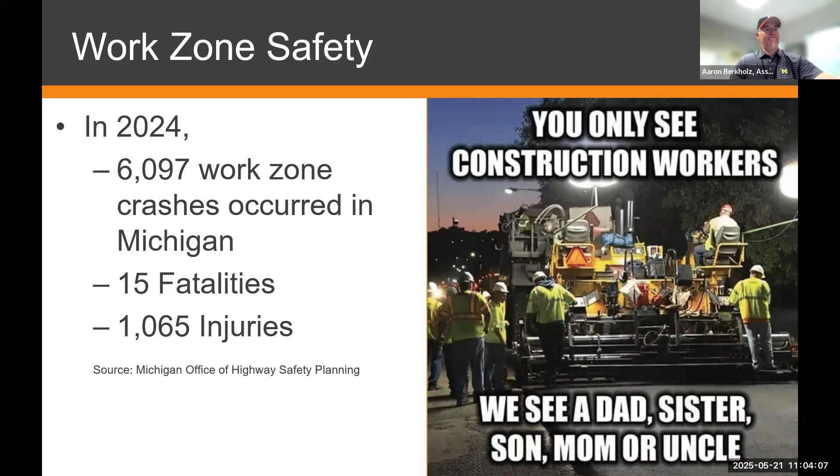Also, it is the law. In Michigan, it's required of drivers to be attentive, to slow down, to minimize their distractions, and to move over. And I'll say not only is it the law, but it's common courtesy.

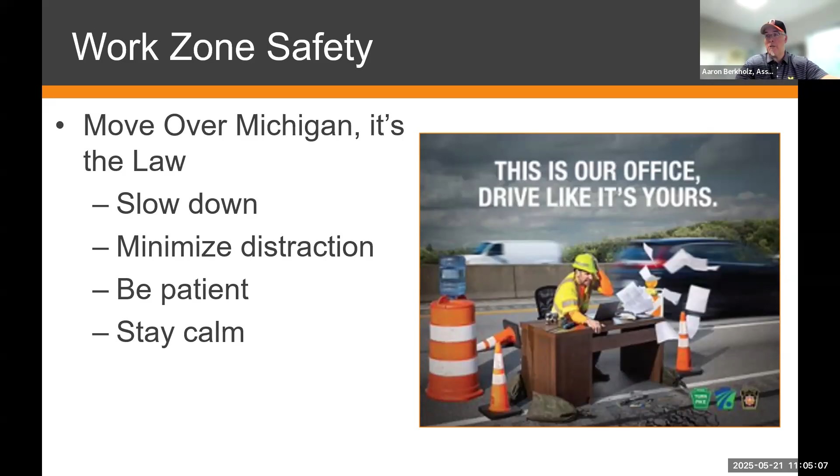Again, I would not go into someone's office during their workday and start to create a situation where I'm distracting them or yelling or not following the rules in their office. Drivers, when they drive through our work zones, need to follow our rules because that is our workplace, that's our workspace. So again, just really trying to highlight the fact that we need driver cooperation in order to keep all parties safe. We do not want injuries or, heaven forbid, fatalities to occur that can affect the families of the construction workers and the drivers.

So I'll go ahead and I'll turn it over to Brent to start the portion of the meeting where we're going to give an overview of the Road Commission. Go ahead, Brent.

Thanks, Aaron. That was a very important topic and one that's near and dear to all of us here at the Road Commission. Again, like Aaron said, thank you for joining us on our 2025 construction kickoff. I'll just go through a couple slides on who we are and why we choose the roads that we choose.

So you can go to the next slide. The Road Commission is responsible for just over 1,650 miles of county road. Of those, more than 740 are unpaved. We're also responsible for 125 bridges, over 2,800 culverts, and we manage and repair over 40,000 signs. We also are a contract agency for MDOT, and we maintain just under 600 miles of MDOT routes. Those are those numbered routes, US 12, I-94, M14, M52, M17. Those are the MDOT routes that we maintain on their behalf.

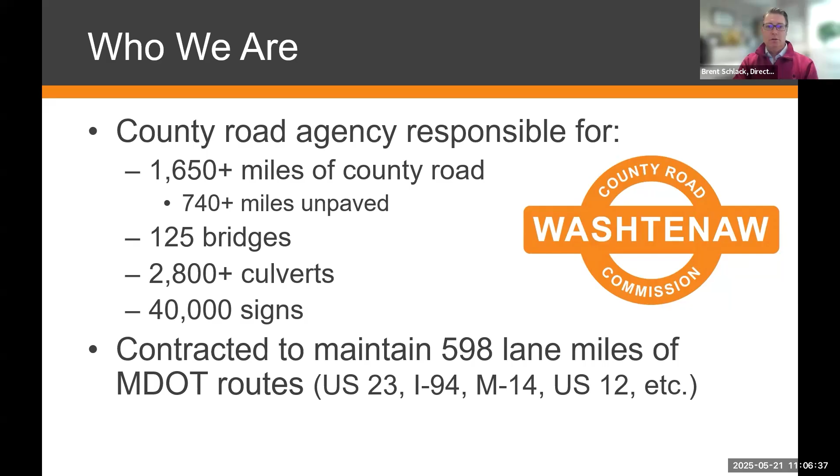So if you go to the next slide, now I'll get into how projects are selected. We have an asset management document, and we follow asset management practices, and this is the definition: it's the ongoing process of maintaining, preserving, upgrading, and operating physical assets cost effectively based on a continuous physical inventory and condition assessment and investment to achieve established performance goals. That is a big mouthful.

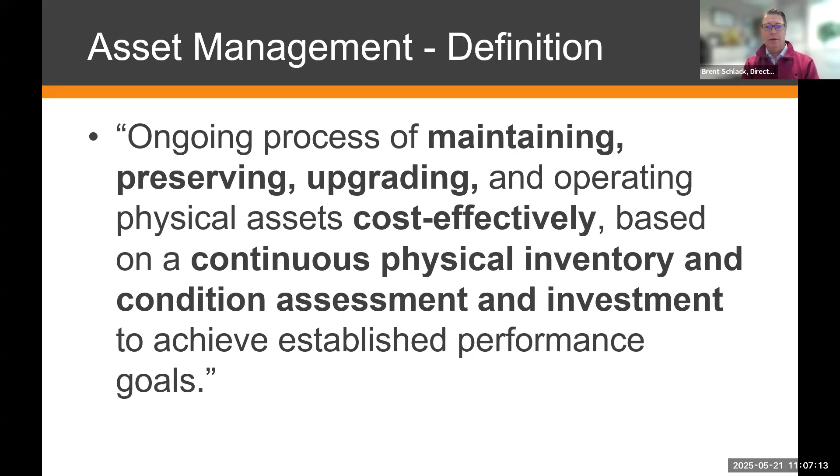Basically, we focus on preventative maintenance. We use a rating system called PASER, which stands for pavement surface evaluation and rating. It's a visual inspection that trained individuals here go out and perform on our roads. Our primary road system they inspect every year, and our local paved road system they inspect every other year. This is on a scale from 1 to 10, 10 being the best and 1 being the poorest.

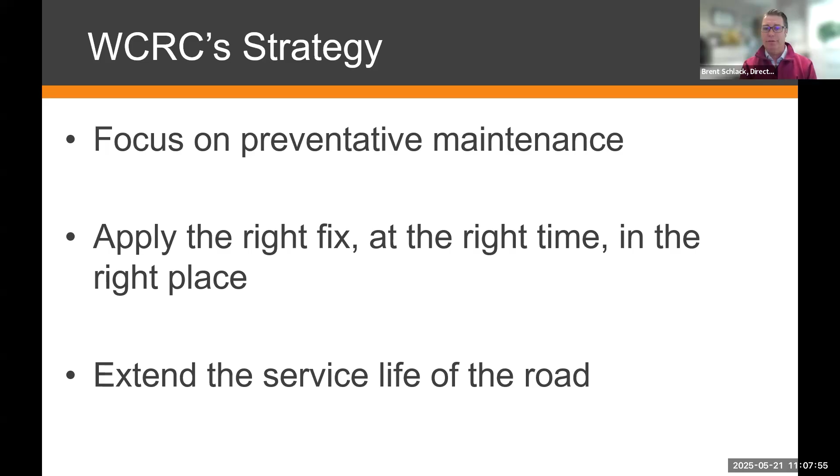We break that down into good, fair, and poor designations, and this helps us determine what preventative maintenance fix to apply. Again, it's applying the right fix at the right time in the right place. Our whole goal is to extend the service life of a road.

We use the example of changing the oil in a vehicle. If you regularly change the oil in your vehicle, the service life of that vehicle tends to last a lot longer. Whereas if you didn't change the oil, it would be a larger fix, and your vehicle would start to break down, which would cost more money. So we want to have that right fix, whether that's a chip seal or a mill and overlay, for our roadways to try and maintain the service life of our roads.

So now I'll pass it over to Adam, and he'll get into some of our construction projects.

I'll talk really quick here about the 2025 season. I'll lay some groundwork, and then we'll get into talking about the projects and types of projects we are going to perform this year. As is typical, you probably recognize throughout the county, the same thing's going to go for 2025. For our types of projects, we'll start with preservation type projects.

This really involves preserving and protecting the existing surface. Then comes resurfacing, which is replacing the surface that traffic drives on. And then reconstruction, which is removing and replacing the base and the surface material of the road. Think of it basically as the stones underneath the pavement.

We also have some bridge projects, which is maintenance and replacement type work we'll do each season. And then we have safety projects to improve safety characteristics of our road segments throughout the county, and those vary. We'll touch on this a little bit here, and if someone has a specific question about a segment of road, we can talk through the chat as well. Then there are some other miscellaneous projects throughout the county.

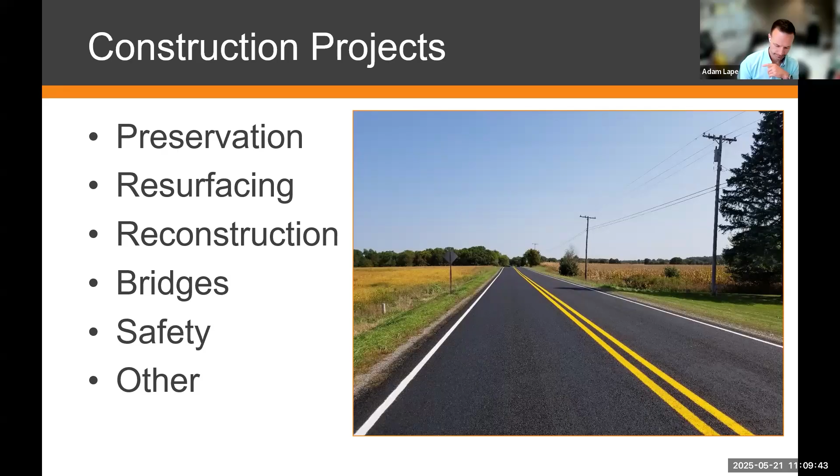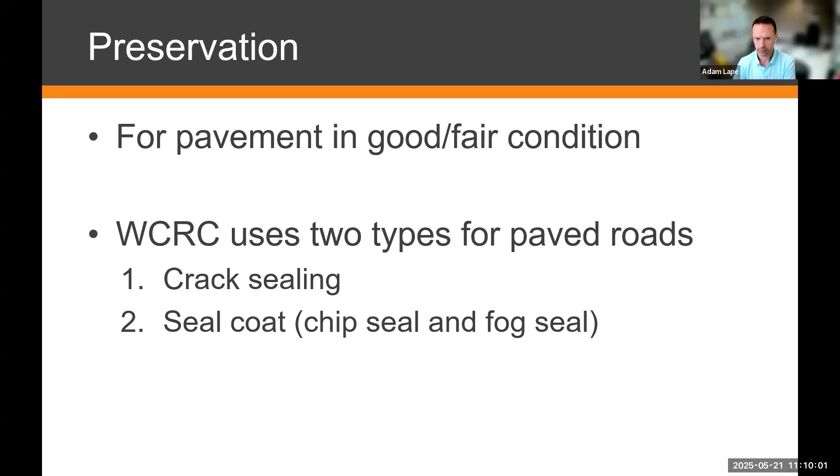For our preservation purposes, that's really good or fair condition road surfaces that Brent was referring to. We have two primary processes to take care of our roads in the preservation stand, and that is crack sealing and seal coat, the chip and the fog seal you'll see us perform. I'll go to the next slides and talk a little bit more specifically about each.

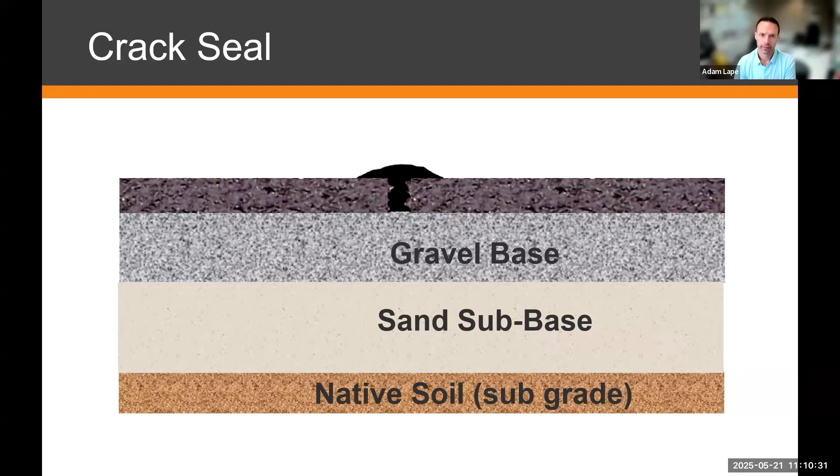Our seal coat process is really similar, but it seals the entire surface of the road. This is essentially a waterproofer, we've referred to it before as sunscreen, you really want to protect yourself when you go outside. Same thing as putting a new roof on a house, you want to protect yourself from the elements that inevitably affect our roads, mainly water, and then the sun itself, which will degrade the road over time.

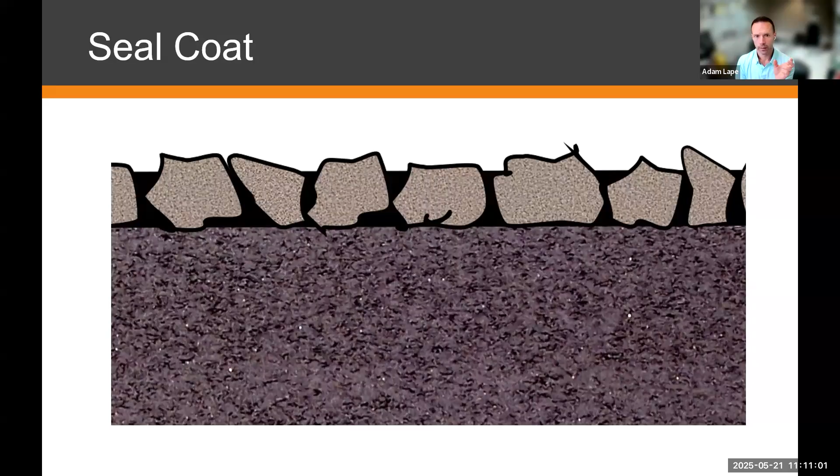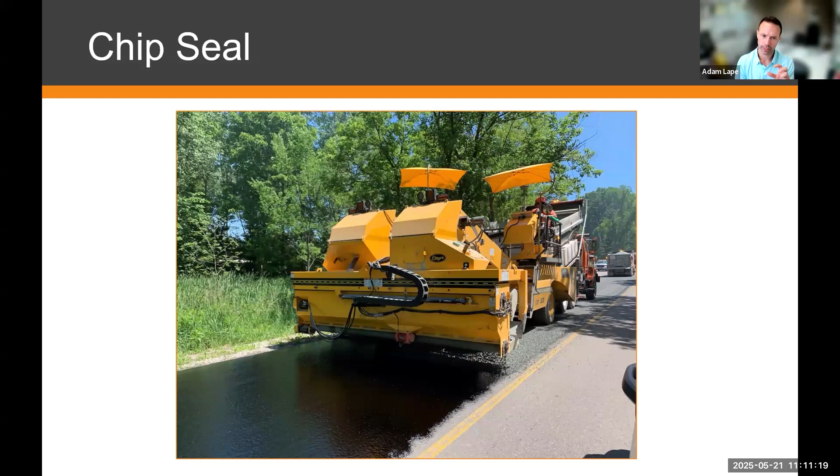We'll spread the material, and we'll show a few pictures in a moment. We spread a liquid binder material, which is a sealer, that's the black material you see in the picture. Then we have a unit, the yellow unit in the picture, that spreads stone, spreads aggregate on the road, providing a bit of traction. It doesn't add any structural integrity, all it does is provide that traction, that wearing surface for the road, because that sealer would be slippery otherwise.

Later in the season we come back, and you've probably seen this throughout our county. We refer to fog sealing as putting that top sealer coat on top of the aggregate we just put in on the seal coat program, the chip stone. What that does is provide an additional layer of sealant, and it also gives that black look to the road.

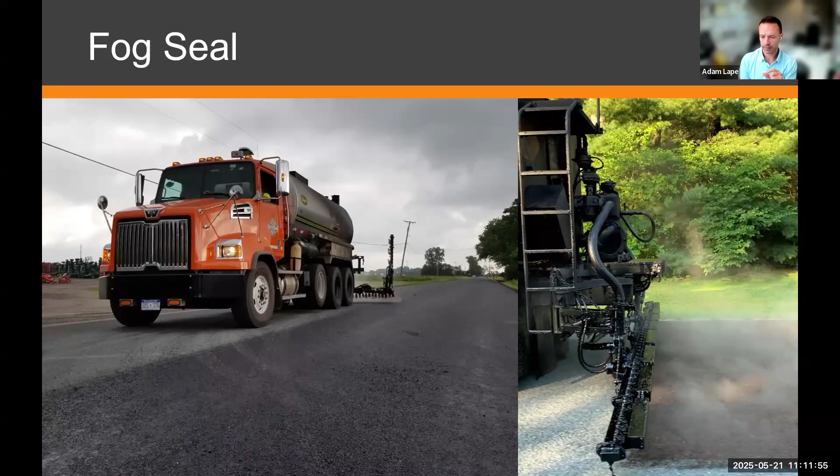We'll send those units out where we have busier segments of road that we're going to seal. And essentially, we just need traffic to follow us. It's very simplistic. We'll keep it simplified for traffic to follow us right through the zone and which side of the road they need to be on, and then we'll direct you accordingly.

And now I'm going to touch back. We've been talking resurfacing. Now we're going to get a little more in depth with resurfacing here beyond the preservation side with Aaron Burkholz.

Thank you, Adam. So again, going back to what Brent had talked about earlier, we use a mix of fixes to manage our road assets. Depending upon the condition of the road, that dictates the work that we can do. So for resurfacing of a road, two of the methods that we'll use with an asphalt road would be to mill and resurface that asphalt road. That would be for roads that are in fair condition. If the road hasn't deteriorated too far, we're able to mill and resurface. If the road has further deteriorated and it's in poor condition, then we get into more of a pulverization of the existing road and then paving that road, putting new asphalt on top of that pulverized base material. And then the third type of resurfacing that we commonly undertake would be putting down a lift of limestone or gravel on an unpaved road.

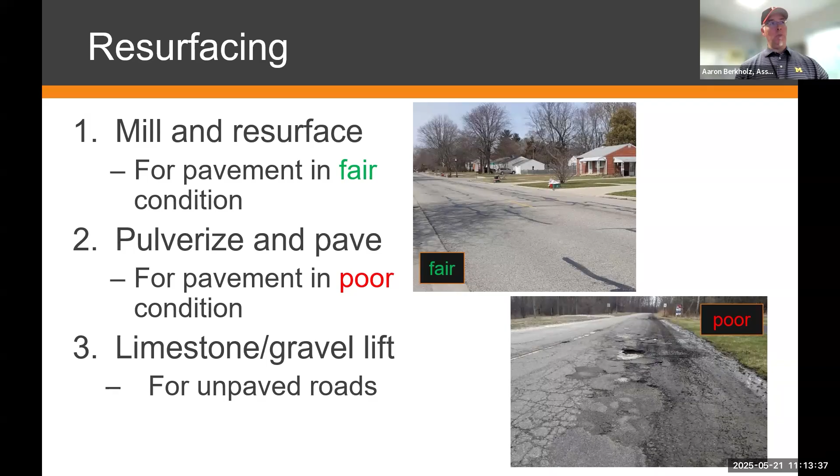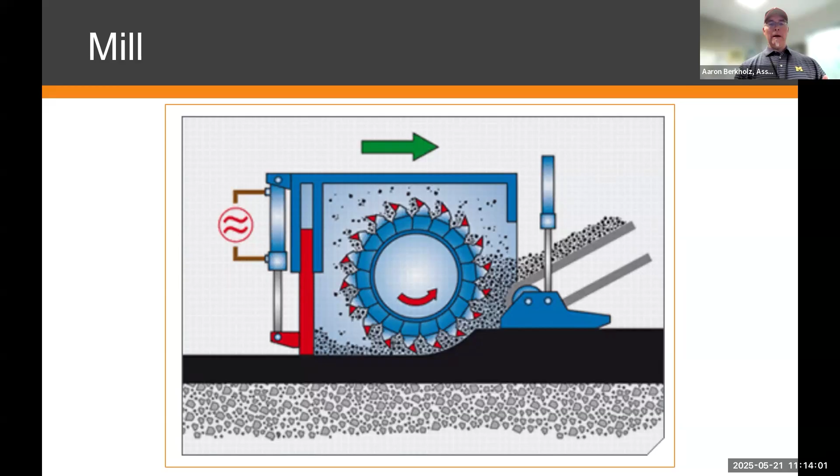There's a large mill machine that comes out, and there's the picture of it. So what that machine contains is like a rototiller, is what I'll refer to it as. You can kind of picture that rotary drum with teeth on it inside that machine. It's underneath in the middle of the machine, and it's grinding up that pavement surface, that 1.5 or 2 inches, and then it's pushing it up a conveyor and into a truck. Just to offer a point of interest, oftentimes that material going into that truck, that ground asphalt, is then taken to an asphalt production plant and reintroduced into new asphalt. We refer to that as recycled asphalt pavement, RAP. So basically there's a certain percentage of new asphalt that goes down that actually contains the old asphalt that's been milled up off the road.

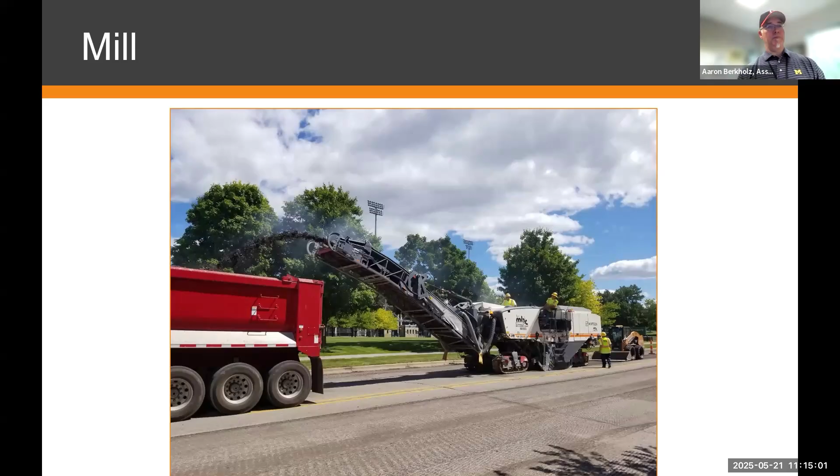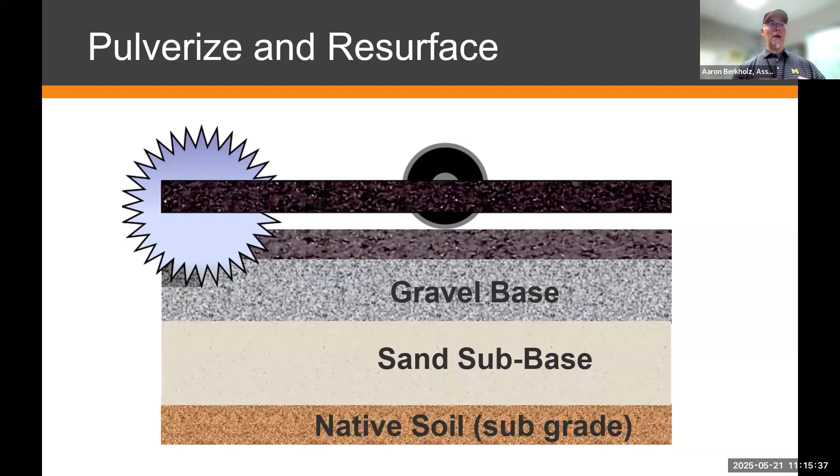Next slide. And then I mentioned that if the road is in poor condition, we get into a pulverization and resurfacing. So the pulverizer sometimes can look like the mill machine, but it operates a little bit differently. The drum under the machine actually turns the opposite direction. On a mill machine, the drum underneath with the teeth turns clockwise. On a pulverizing machine, it turns counterclockwise. And that's because we want to keep that material that's being crushed under the machine.

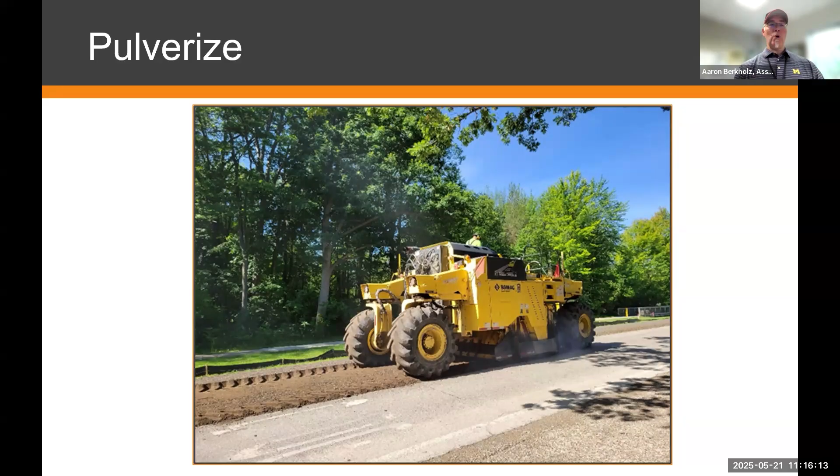Here's an example of what that machine looks like. You can see there's no conveyor on this machine. The material's not being pushed up a conveyor into a truck. It's remaining under the machine, being crushed and being blended. So you're taking that existing poor asphalt surface on the road and blending that with the underlying base aggregate, creating this homogeneous mix of material. Then that material is spread out, compacted, and then we actually apply a new asphalt surface to that.

Something to note is that asphalt is very hot. For people that may be in the area, it's important that anybody like a pedestrian or a bicyclist, someone with a dog or small children, stay away from that asphalt because it's typically between 275 and 300 degrees when it's being placed. For motorists, it's important that they follow the direction given by the traffic regulators, also known as flaggers on site, because you don't want to drive through asphalt that's just been placed. You can imagine if you drive your rubber tires through asphalt that's 275 degrees, generally that's not good for your tires, and it's also not any good for our new asphalt.

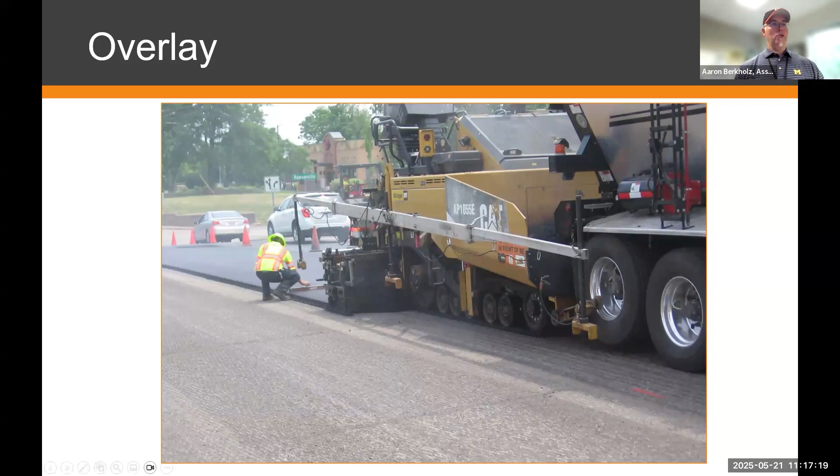We'll continue that through the season, likely into October, November, and then start back again in the spring at each season. It's a very important part of the process, and the soft surface roads certainly do benefit from it.

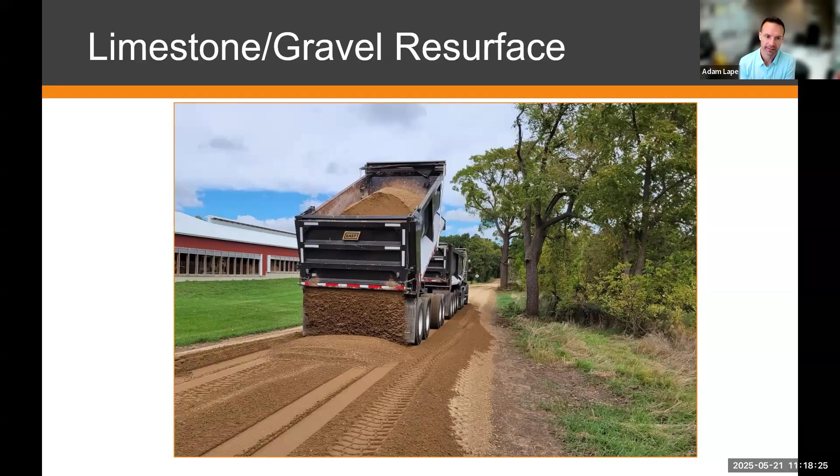I believe Aaron's going to talk a little bit more about resurfacing and what we're doing in 2025. Thank you, Adam. So again, the Road Commission is resurfacing our part of the planet here in Washtenaw County. We're going to asphalt pave approximately 27 miles of county road.

We're going to place either a limestone or gravel resurface, a lift of limestone or gravel, to the tune of about 7.2 miles of county road. And then Adam and our operations team working on chip seal are going to create that chip seal surface that Adam talked about earlier on 49 miles of county road. So a great deal of resurfacing will be done in this construction season of 2025.

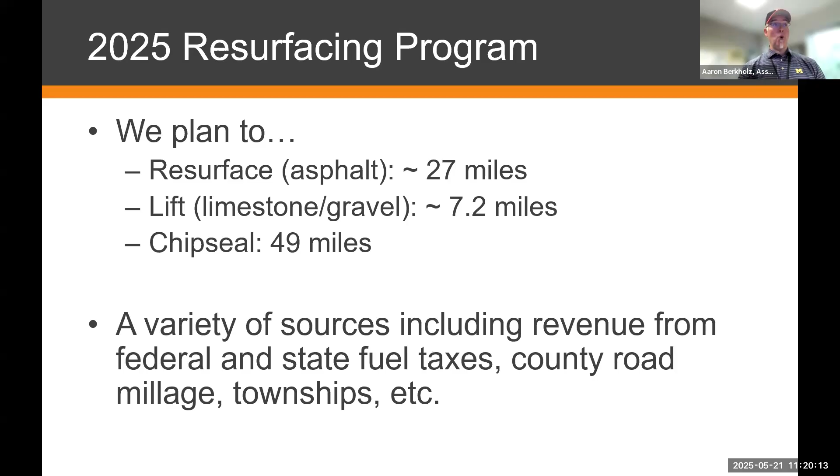There's a variety of sources of revenue to accomplish this work. We work as a team here at the Road Commission to secure federal funding, which is typically project specific, identifying specific projects on which those funds would be used. The biggest part of our revenue is generated by state fuel taxes, registration fees, and we're very fortunate to have a county road millage. We really appreciate the continued support of the voters of Washtenaw County in affording us the opportunity to take that millage money and invest it directly into our annual resurfacing program.

We also have great partners at the township level, and townships are not required to contribute to road projects. But the reality is, particularly on local county roads, unless townships are able and willing to contribute, we can't make improvements. So again, we can't speak enough about how much we appreciate our township partners in accomplishing our good work each year.

Some of them are mill and resurface, some are pulverizing and paving, and then some are the limestone resurfacing that Adam talked about. I'll mention that some of these roads have higher traffic volumes. An example would be Clark Road and Huron River Drive, in the vicinity of St. Joe's Hospital - I'm dating myself, I believe it's called Trinity Health now. But that's a very busy section of Clark Road and Huron River Drive.

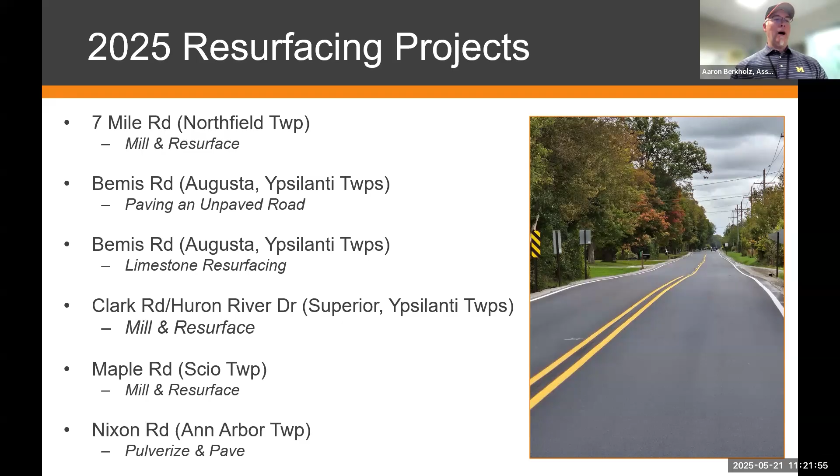We're going to do a mill and resurface there. With a mill and resurface project, we can maintain traffic - we can have traffic run in the adjacent lane and control that with flaggers while we're working in a closed lane. With a pulverization and overlay project, an example would be Nixon Road.

Nixon Road, from US-23 north up to Pontiac Trail, is in such poor condition that we have to pulverize that road. To pulverize and shape that material, compact it, and prepare it for paving, we have to close the road. Now, we would maintain the road for local traffic, like for instance, there are some subdivisions along that section of Nixon Road.

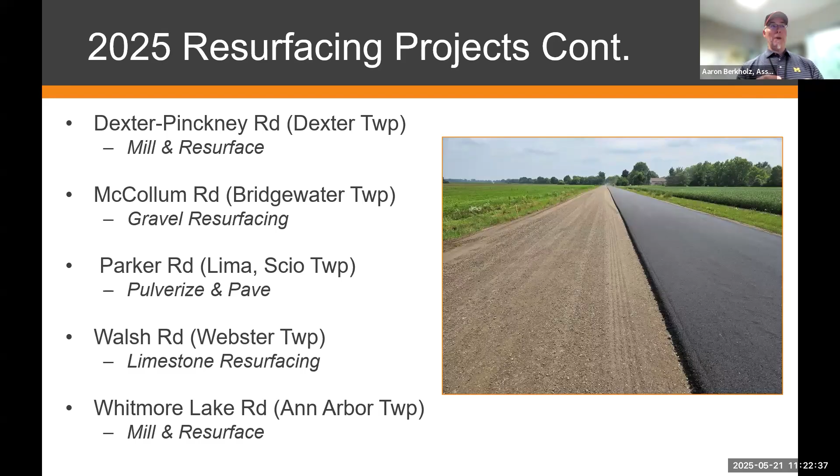But again, we would have to limit the traffic to just the local traffic—the people that live within that. We would maintain it for garbage pickup and for delivery. There are some differences between a full closure and a lane closure, depending on the scope of work. The best way for the public to identify specific information on any of these projects is to reference the Road Commission website.

You can find a map on the Road Commission website that includes all of our resurfacing projects as well as other projects we're performing this season. You can click on the section of road you're interested in to get details like traffic impacts or the specific scope of work. That's the best way for stakeholders, motorists, bicyclists, and officials to know what's going on. It also provides a point of contact, since we have specific project managers at the Road Commission who oversee individual projects.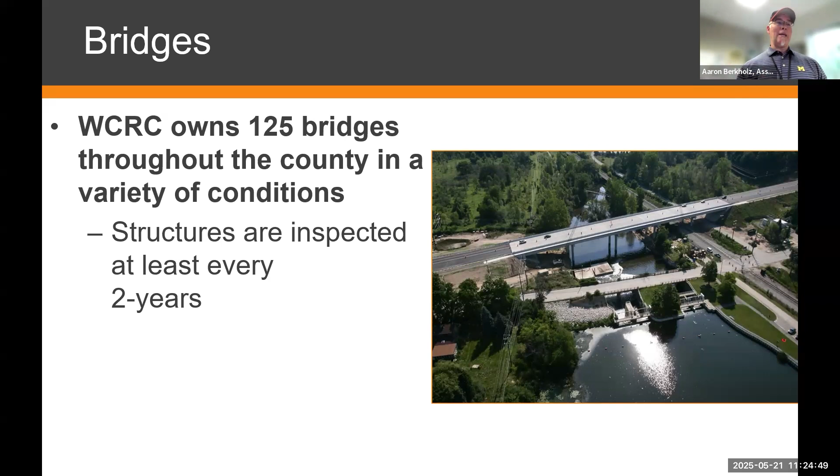The vast majority of the bridges we own are more in the range of 20 feet to 100 feet in span. Anything less than 20 feet we refer to as a culvert. Culverts are typically smaller structures, under 20 feet, and a lot of times they're pipe culverts, like the example shown here. We own over 2,800 culverts throughout the county, in varying sizes and various conditions.

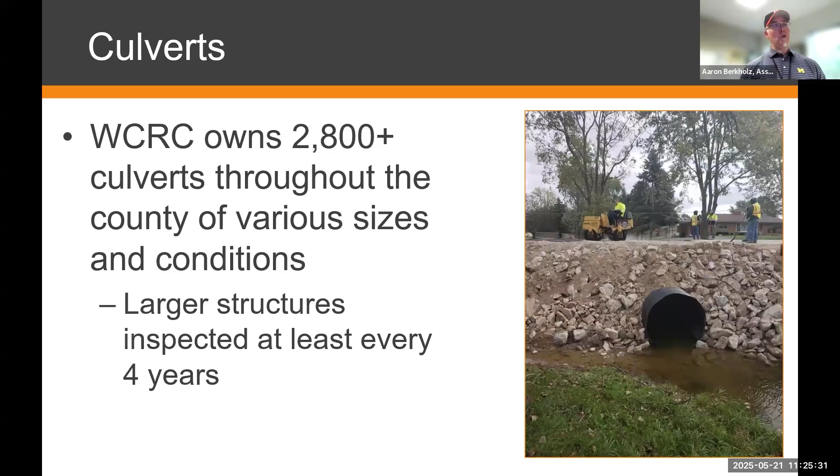We inspect our culverts—anything 5 feet or greater—at least every 4 years. If a culvert is in poor condition, especially if it has a weight restriction, we increase that frequency and inspect it yearly just to make sure we're monitoring the condition of that deteriorated structure.

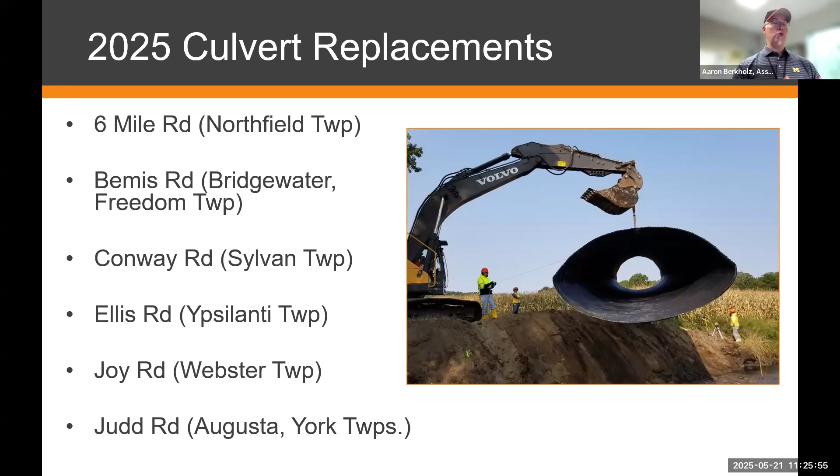We have a lot of culvert replacements in this year's program. A big part of the culvert replacement program has been made possible by working with our township partners, the Road Commission, and the Water Resources Office, because Water Resources was provided funding through the county board to undertake stormwater improvements. Replacing a county road culvert does enhance stormwater quality.

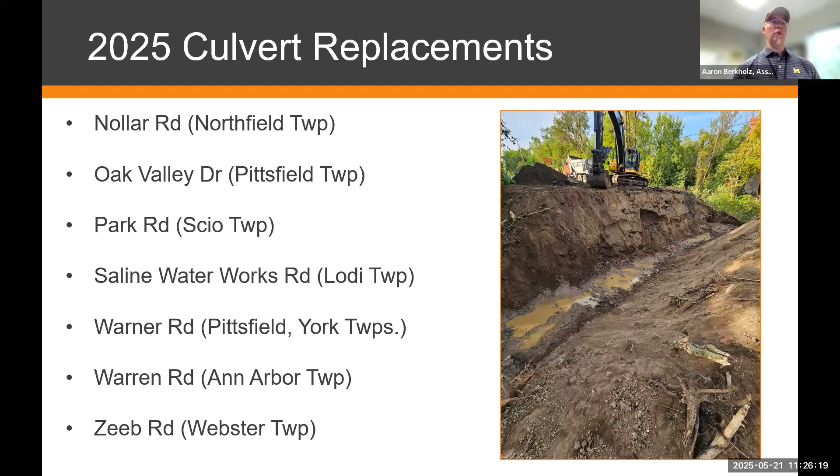This shows a list of some of the culvert replacement projects we're going to undertake this year. Again, a great resource for the public and our stakeholders is the Road Commission website—you can look at the map for specific information on a given culvert project, the scope of work, whether it requires a road closure, and who the project manager is that you can contact. We have culvert projects throughout the county this season that we've identified and intend to complete.

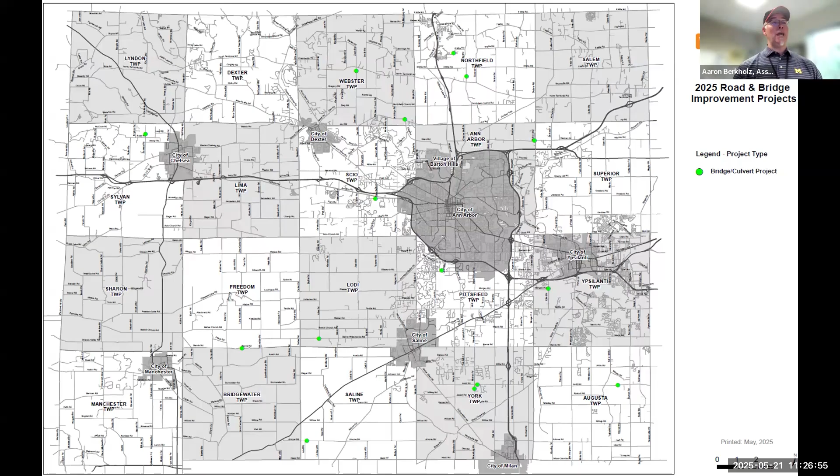So I'll go ahead and turn it back over to Brent, and he's going to talk specifically about some traffic and safety related topics. Thanks, Aaron.

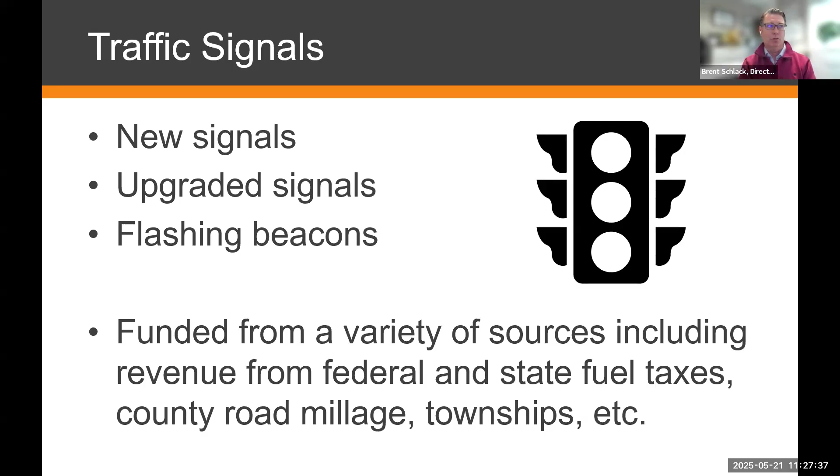We also have projects within our traffic and safety group. These projects include new signals or upgrading signals to modernize them, or installing flashing beacons or rapid flashing beacons for mid-block crossings. These, again, as Aaron stated, are funded from a variety of sources—federal aid, Michigan transportation funds, state fuel taxes and registration fees, county millage, or with some of our township partners.

Here's a list of projects we're working on. Some have been completed this year, like 6 Mile and Currie, where we installed a flashing beacon, and Bemis and Marlow, where we worked with Augusta and Ypsilanti Township to install a rapid flashing beacon. One upcoming project will be a new traffic signal at Parker and Shield.

That's in Lodi and Scio Township.

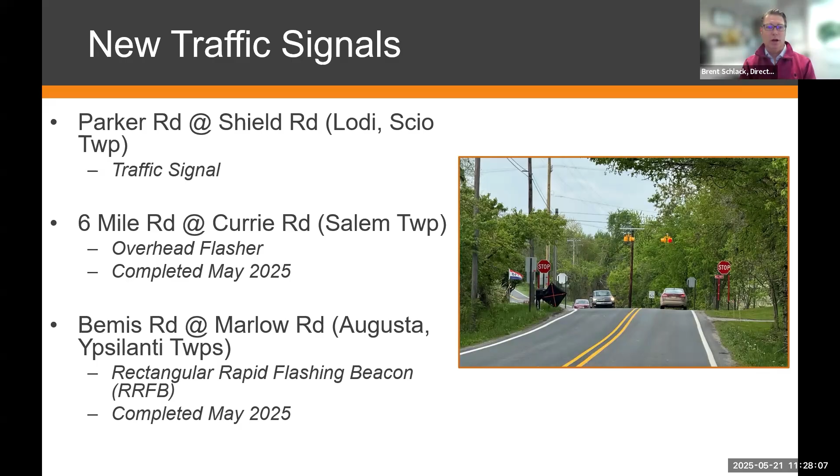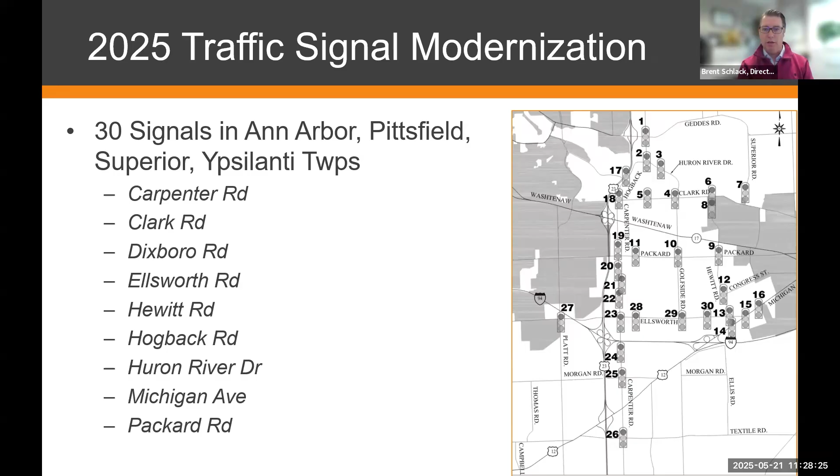We also, like I indicated earlier, modernize our signal system. You can see a lot of our signals are on the eastern side of our county, and we have about 30 signals that we're modernizing. These would be through a federal aid project, through congestion mitigation and air quality, and there's a long list along those corridors that we're looking at for modernizing those signals.

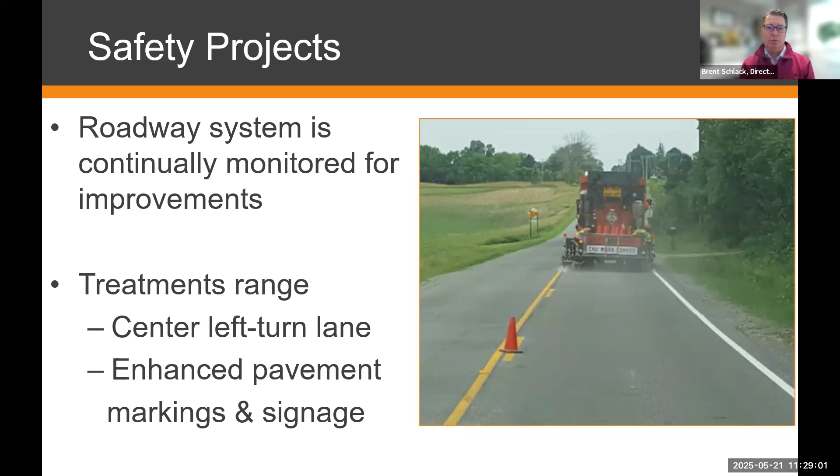We also have safety projects that we perform here at the Road Commission, at locations we've continued to monitor for improvements. We're looking at center left turn lanes to help move people out of the flow of traffic to make their turning movement. We also have enhanced pavement markings and signage, and those can be from a variety of sources, whether local funds or federal aid.

We also upgrade and repair guardrail within the traffic and safety group, at locations where we need new guardrail or need to modernize existing guardrail. Unfortunately, we do have locations that get hit that we have to repair, so we manage that contract with a contractor.

We also have a traffic management program, our NTMP, which looks at traffic calming, mainly installing speed humps within certain areas that qualify. Foster Ave has gone through that process, and they'll be getting speed humps here soon.

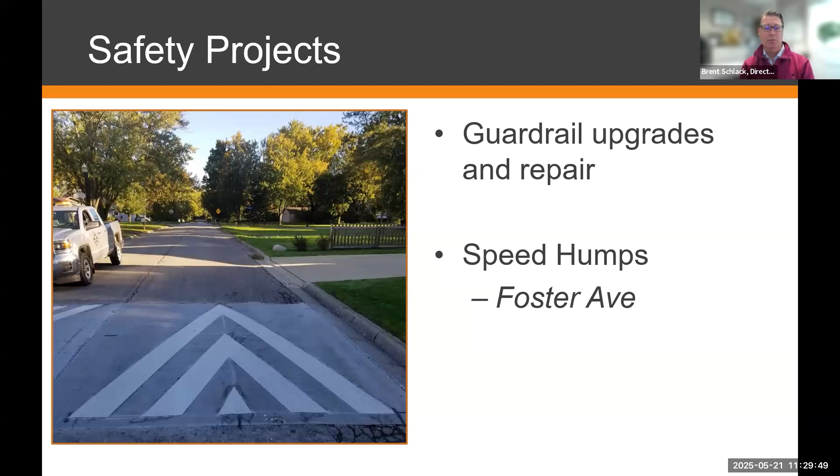One big program for us is our pavement marking program, where we install over 6 million feet of long line pavement marking—our white and yellow markings. Some of that is retrace, and some is on chip sealed roads where we need to repaint those lines. We also have special markings: stop bars, turn arrows, crosswalks, railroad markings, and the green paint for non-motorized lanes, those bike lanes. So we look to improve those locations.

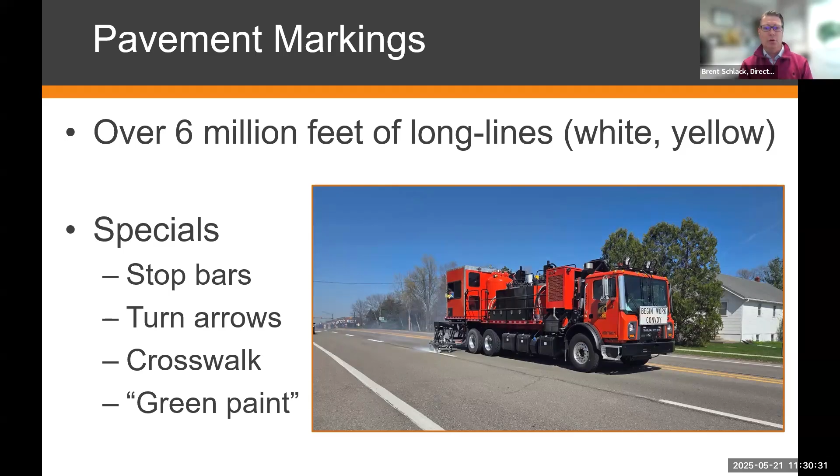So now I'll turn it back over to Adam, and he'll get into some of our road maintenance.

Thanks, Brent. We'll talk a little bit about maintenance we perform quite often throughout the county, and how we schedule that maintenance. A lot of it is as needed, in response to field information and current conditions we receive through staff, constituent calls, and our WCRC fix-it requests. That varies from pothole patching, general maintenance, drainage, grading the soft surface roads, and weather events that routinely require our staff to clean up debris impacting traffic and potentially blocking roadways.

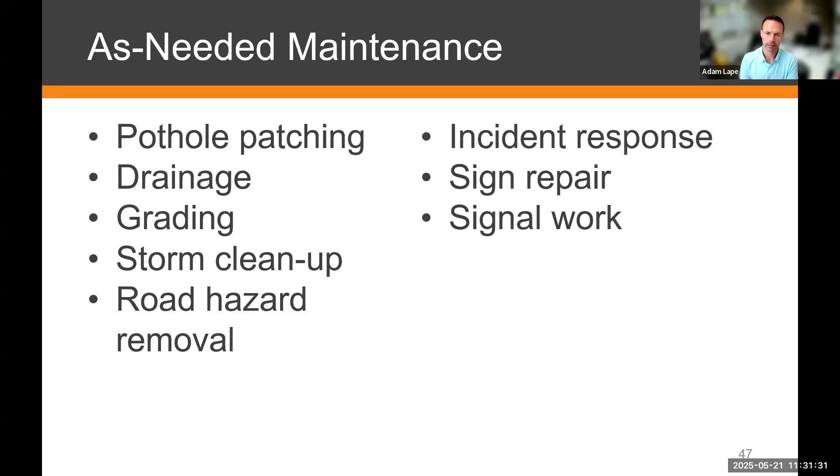Then there's road hazard removal—some of the unfortunate things you see through Mother Nature, like animal carcasses or debris that falls out of vehicles, things we address routinely throughout day-to-day activities. And as some of you probably saw this morning with the freeway system, we have quite a bit of incident response responsibility from our staff. We responded to some crash incidents this morning. Our traffic and safety team out of the engineering department also has staff who repair our signs and perform signal work throughout the county.

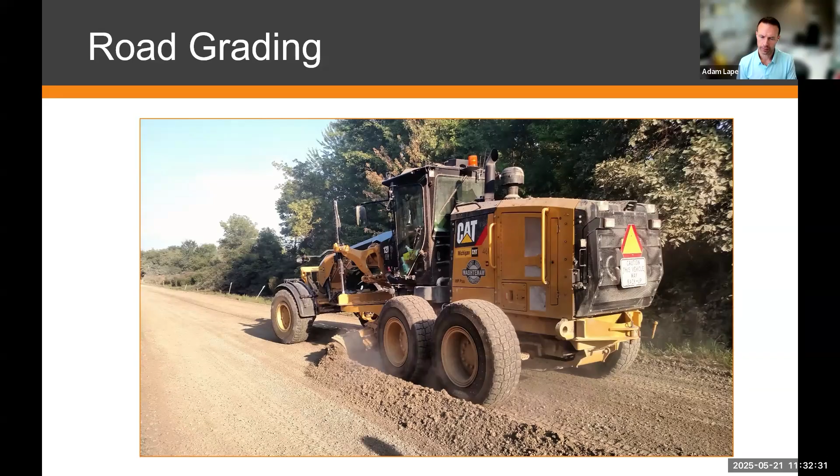Here's a picture of road grading. This is near and dear to most people in the county, with over 600 miles of unpaved road—something you definitely see and come across. Here's our process: this is one of our 11 road graders out grading a road, which we refer to as scraping. We scrape the road, collecting excess material pushed off the edge and building a windrow—that's the material off the left side of the grader unit. Then we scrape the other side of the road and start to build the crown back up, smooth it out, and apply dust suppression, which is the dust control or brine you may hear us talk about.

Moving to the next slide, you'll see that's still scheduled maintenance that we work forward with. The dust control program largely rules and pushes most things forward, scheduling a lot of our other maintenance because we want our roads to be as solid as possible and prevent fugitive dust. On top of that, toward the edge of the road, we perform roadside mowing, and also just a quick reference to some of the paved surfaces throughout the county.

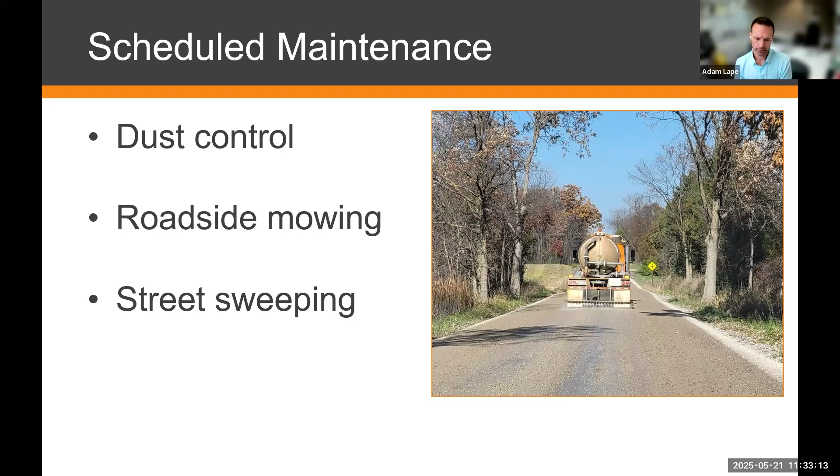We do sweep twice throughout the season in the curbed areas, and some townships partner with us for a third, supplemental sweeping. Now we'll move to the next one and talk a little bit about scheduling.

We typically work mid-April through mid-November, what we consider a construction season. Obviously, we're subject to some environmental restrictions and just weather in general. This week has been a little unseasonably cool, so we've had to adjust some of our progress and processes with the project specifically. We've kind of downshifted a little to let that warmth come back. We do need dry conditions for the most part, and we also need some generally decent warm weather to continue some of our work.

Off-season projects are typically possible, but those are usually preparatory work for another project or on an emergency basis, because it's very challenging to work when it's cold. And obviously with snow-covered surfaces, we can't quite get our equipment in there to do that work.

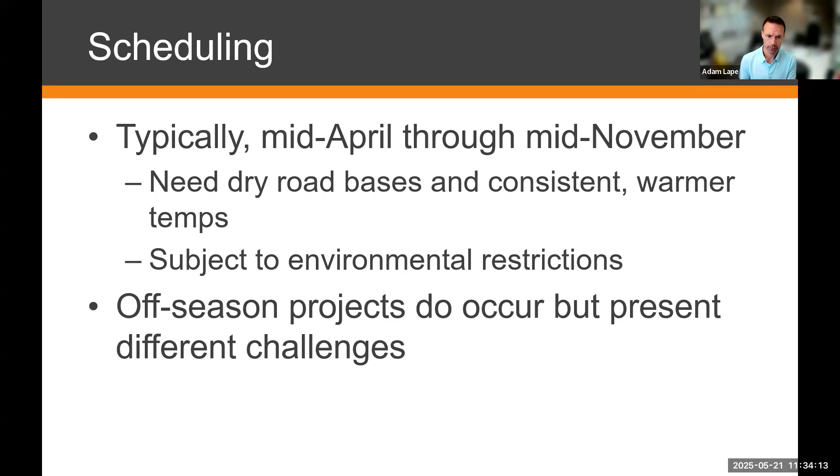One environmental restriction I have to note is we are sometimes restricted through bat roosting, fish spawning, mussel spawning, and oak wilt considerations. So we try to be considerate of that, but it does affect some of our schedules. That's why sometimes you see us do drainage work mid-season, in a drier time after July, really based on the environmental impact we try not to cause.

It's very weather dependent. Just like I noted, our seal coat program - we ran a little bit yesterday, but we had to stop and pause today. There's just too much humidity and moisture present.

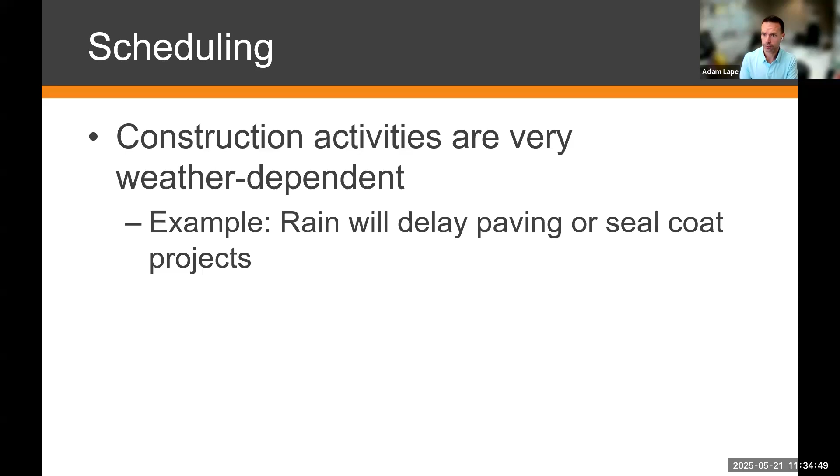It is a bit complicated as we schedule. We have a lot of moving parts and a lot of responsibilities to consider. We have a responsibility to MDOT, so we have to make sure we're not affecting their traffic with traffic we create through a road work zone. And as the environmental considerations I noted, utilities do impact our work from time to time, so we have to work on relocation and really just coordinate with other projects, whether it be an MDOT project or another internal county project. And then inevitably, we have to find the specialized equipment to conduct that work.

This really is that reminder - Aaron and I talk about this quite a bit in all our presentations, but it is serious to us and it matters to us. If the road's closed and we have the signage and the cones, or there's a vehicle there blocking with our flashing work lights on, it really does mean it's closed. There could be danger behind it, there could be something going on, there could have been a catastrophic failure with the road. It's very important that you abide by those guidelines we set in place to try to maintain everybody's safety, including our crew's safety.

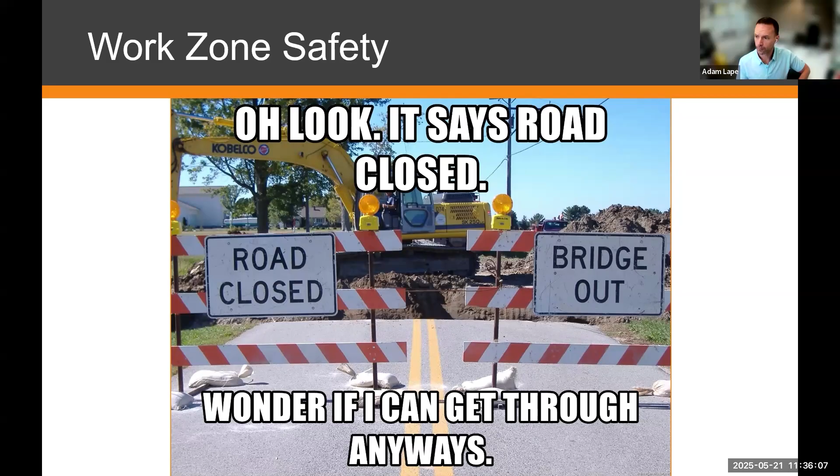So now I'll give Tiffany an opportunity to speak a little bit on construction communications.

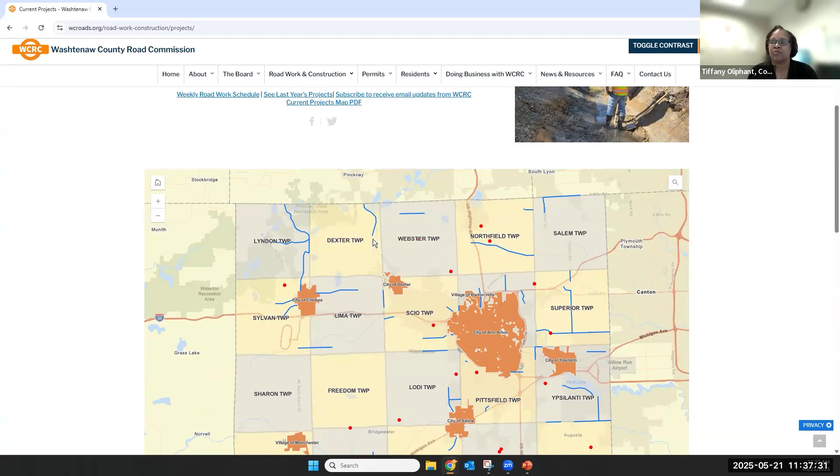You can actually click on each road segment and it will tell you what's being done. It's a mill and overlay on Dexter Chelsea Road. These different road segments are interactive. You can move in and out of the map and scroll down.

Here are various project cards that will tell you what's going on there. We've actually streamlined this countywide, so we have our resurfacing project, and here you'll find all the roads that will be resurfaced - from what Brent was saying, from your mill and resurfacing to your limestone resurfacing to your pulverized and resurfacing. So you'll have all of these.

Once you click on one of those, they'll have all the information, from the funding to the road impacts to the map, obviously, of where it's located, the township it's located in, the contact. We've had virtual public meetings there.

You can actually subscribe to project updates here at the corner. Put in your email address, your name, and your zip code, click on your townships that you want information on. Then here you can click on your advisories and weekly roadwork schedule. I'll go through that. And here are the project updates for projects you want information on. We update this every construction season, so these are always updated.

Here's the weekly roadwork schedule. This is a very important tool. We update this every Thursday. So this is a list of all the weekly roadwork going on in your townships. You can put this in alphabetical order, or however you'd like to view it. It's about alphabetical order by township, and you'll see the work being done, the traffic impact, and the contact.

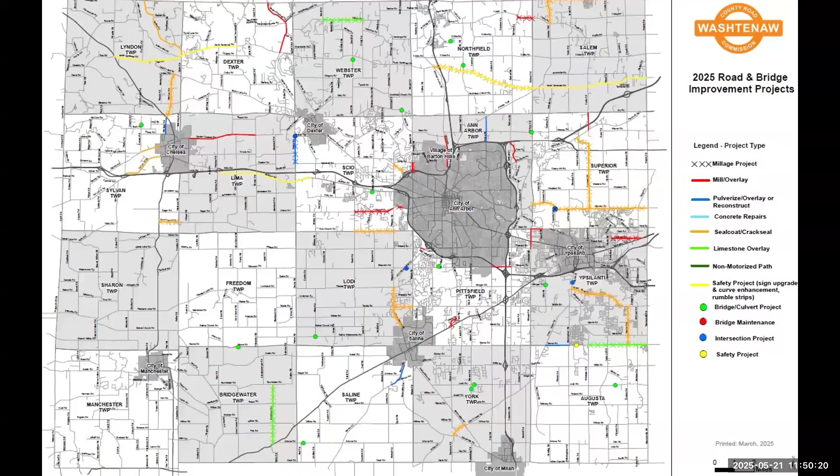Thanks, Ann. Maintenance-wise, there's no goal to widen the road. Over time as we maintain it, the material spreads out and then crews collect it back in, then it spreads again and they collect it back. When they spread material on road segments this year, it'll look narrower initially, and then as it degrades it settles and spreads out again. That's why our crews do that grading we referred to, pulling it back in.

Generally, maintenance is performed throughout the season as needed, matched with dust suppression depending on seasonal conditions. If it's very wet, like this weather trend, our crews would just scrape and grade the road and continue on. If it's 95 degrees, sunny, dry and windy, we'd apply dust suppression. So there's that general maintenance, but no intentions to widen the roads further than they are. We do mow and trim trees when we can, whether it's a natural beauty road or a traditional unpaved road.

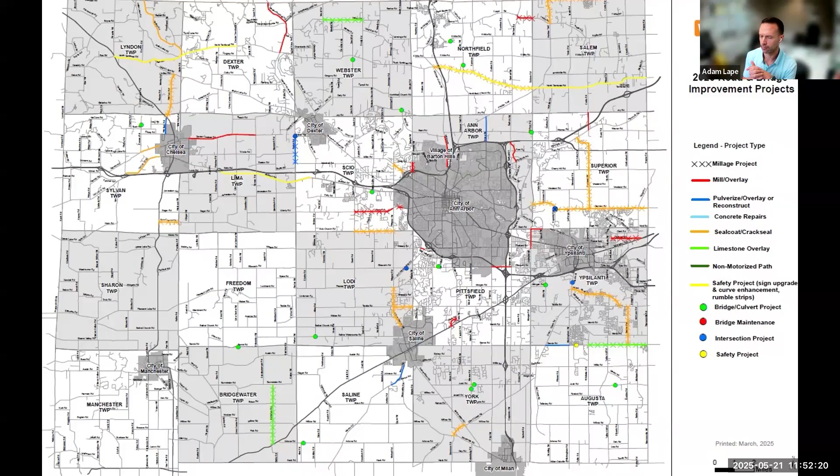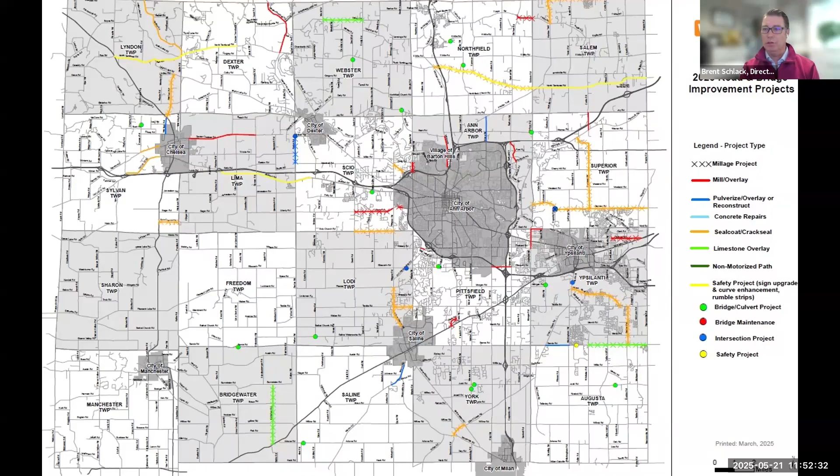Some of the increase in traffic you may be seeing is because MDOT recently removed the bridge on Joy Road across US 23, which may route additional traffic onto Warren Road. I'd encourage you to contact local law enforcement if you see behavior not conducive to that area—motorists are expected to drive to conditions, and local law enforcement sets what those conditions are. We understand people use this road as a natural beauty road, and we appreciate the effort it took to get that designation. We're not trying to do anything to enhance speeds or decrease the safety of that roadway.

Thank you, Ann. We appreciate your questions.